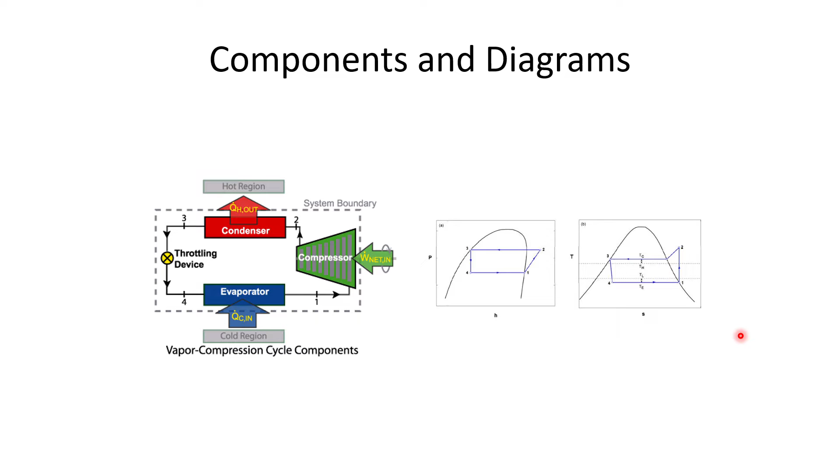This cycle we will understand on two different diagrams, that is temperature versus entropy diagram and pressure versus enthalpy diagram, one by one. This diagram is temperature versus entropy diagram. Let us understand the different processes here first. This is my peak point on TS diagram. If I follow the left side line from peak point, this is saturation liquid line. If I follow right side line from peak point, that is called saturation vapor line.

The region on the left side of saturation liquid line is a liquid region. Right side to the saturation vapor line is a vapor region, and in between these two lines, it is a mixture, that is liquid plus vapor. Point 1, we assume that my first point is on the saturated vapor line, that is the evaporator exit point. 1 to 2 is a process in which compression will happen, so temperature and pressure will increase.

You can see here when my refrigerant comes out from evaporator after taking heat from refrigerated area, the state is 1, that is a saturated vapor, and pressure is P1. After passing through compression, it will reach a pressure P2. When your pressure is increasing, simultaneously temperature is also increasing. And point 2, you can see, is in a vapor region. So this particular point is a superheated vapor.

2 to 3 process is a condensation process, means my refrigerant will enter into a condenser. It will reject this amount of heat first, that is called heat of superheat. It will become a saturated vapor, then it will reject latent heat, and it will come to point 3. This process will happen at constant pressure, and the third point is saturated liquid point.

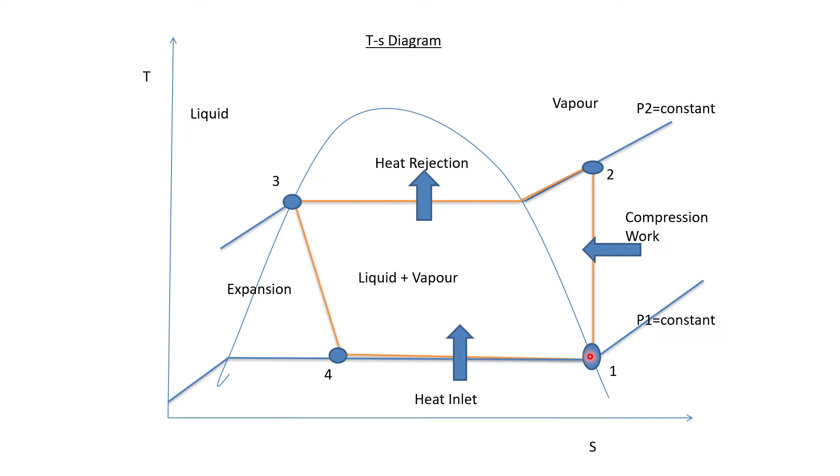3 to 4 is expansion process, in which enthalpy remains constant, entropy slightly increases, and it will reach point 4. We can see here the fourth point is in the liquid vapor region, means it is a mixture, not 100% liquid, not 100% vapor. And then it will enter into the evaporator, where the refrigerant will take heat from the refrigerated area, and it will return to saturated vapor point.

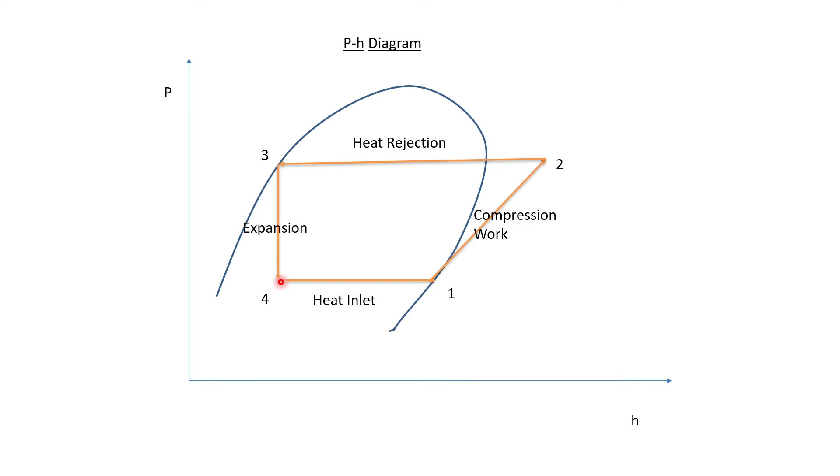Same processes we will plot on P-h diagram, that is pressure versus enthalpy diagram. 1 is a saturated vapor, 1 to 2 is a compression process, 2 to 3 is heat rejection, 3 to 4 is expansion at constant enthalpy. So 4 is constant enthalpy, and 4 to 1 is heat inlet or refrigeration effect.

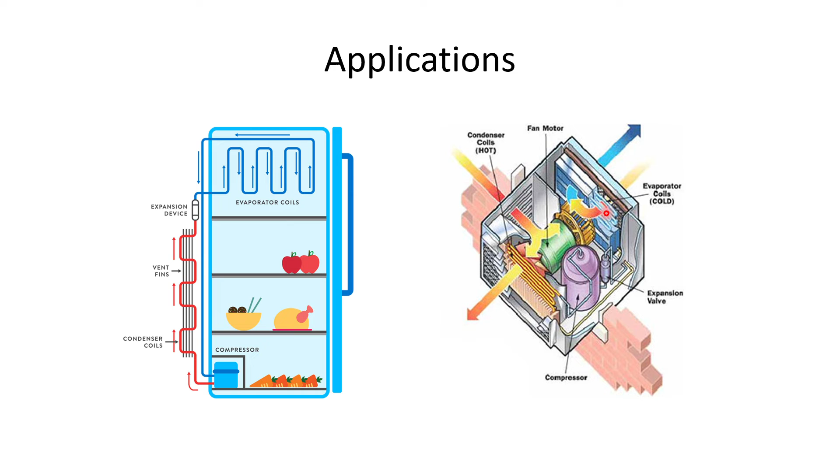Here also this is a compressor, condenser, expansion device will be here, and then it will come to evaporator. This portion will be inside your room, which will give you cool air into the room, and condenser will be outside so that heat will be rejected into atmosphere.

Now let us come to the calculation part. If I want to do a calculation of a simple vapor compression refrigeration cycle, I need to have four different points: 1, 2, 3, 4. First is the exit from the evaporator, then exit from the compressor, exit from the condenser, and exit from the expansion device.

If all points are known to me with respect to temperature and pressure, we can calculate the enthalpy, either using a property table or using the P-h chart of the particular refrigerant. We'll get H1, H2, H3 and H4. Once we have all the values known to us, we can do the calculation. Let us start with this.

Suppose I want to calculate the refrigeration effect, or cooling effect. This is the particular portion where the cooling happens, that is the evaporator. So the refrigeration effect or cooling effect is nothing but mass flow rate into delta H, H1 minus H4.

Now compression work will be 1 to 2, in which mass flow rate into delta H will give you the compression work, and heat rejection is mass flow rate into delta H here, that is H3 minus H2. It will be negative as heat is rejected, or you can multiply mass flow rate into H2 minus H3.

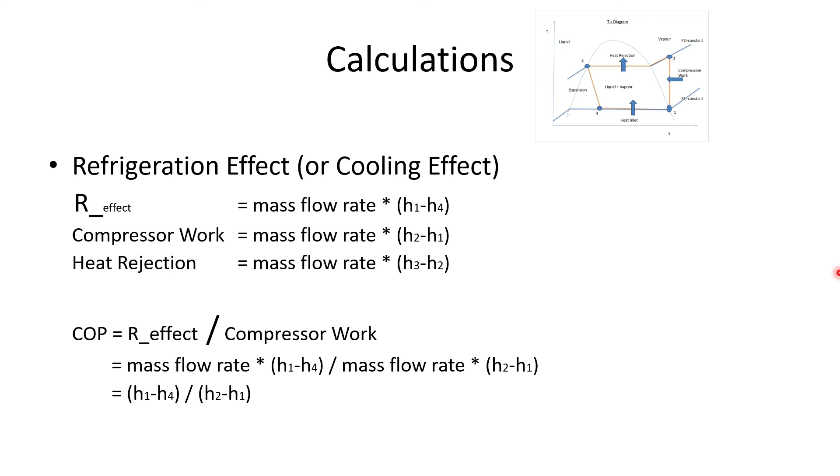The coefficient of performance of the VCR cycle is refrigeration effect divided by compression work. Refrigeration effect we already know, compression work we already know. If you take the ratio of these, it will give you the coefficient of performance of the VCR cycle. Let us understand with some numerical values.

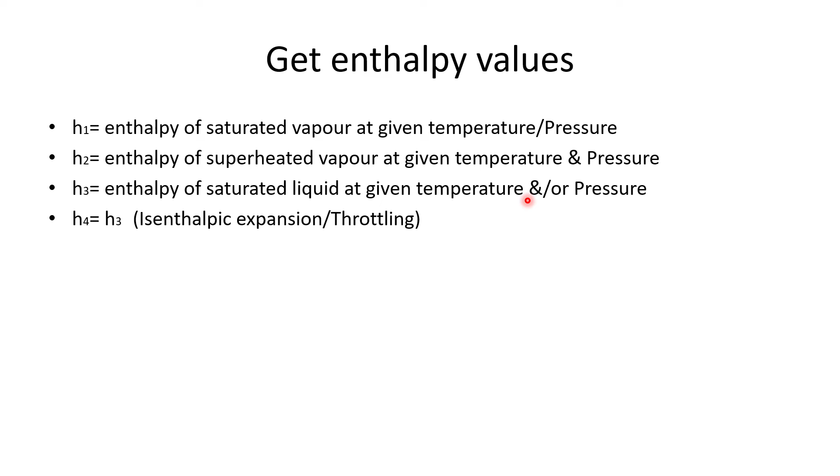As I mentioned, H1 is the enthalpy of saturated vapor at given temperature and pressure. H2 is the enthalpy of superheated vapor at given temperature and pressure. H3 is the enthalpy of saturated liquid at given temperature and pressure. And H4 is equal to H3 as it is an isenthalpic process, or throttling process. We will understand this now using R12 as a refrigerant.

When refrigerant comes out from the evaporator, its temperature is minus 30 degrees Celsius. After compression, the refrigerant temperature will become 60 degrees Celsius. After heat rejection in the condenser, the temperature of the refrigerant will become 40. After expanding, it will come to 1 bar pressure and minus 30 degrees Celsius. So temperatures and pressures are known to me. Now I want to get the enthalpy value of each point.

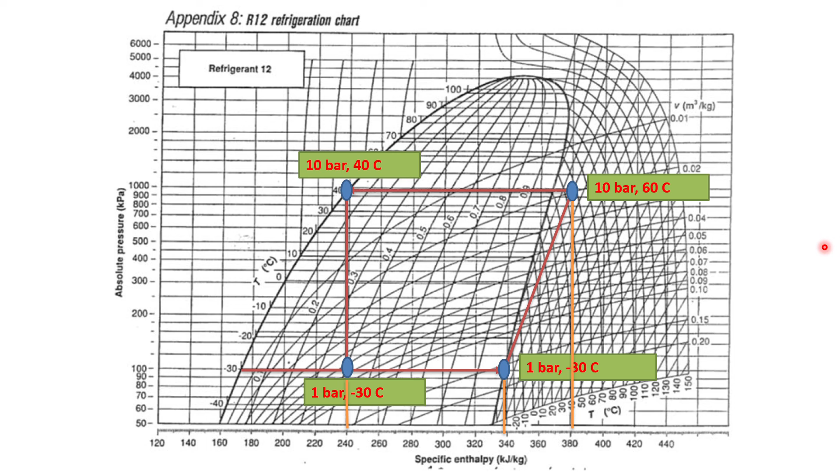Once I have all these values, H1 is equal to 338 kilojoule per kg, H2 is 380, H3 is 240, and H4 is also 240. For simplicity of calculation, let us assume that the mass flow rate of refrigerant is 1 kg per second. We will calculate refrigeration effect, compression work and COP. If the mass flow rate is known to you, you can multiply here.

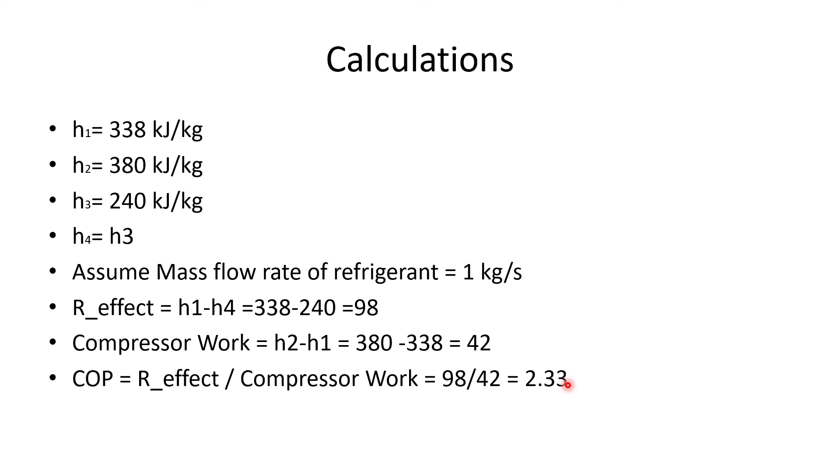The refrigeration effect is H1 minus H4, that will come to 98 kilojoule per kg, multiplied by 1 kg per second. Kilojoule per kg into kg per second will be kilojoule per second, so your answer will come in kilowatt. Same way, compression work is m dot into H2 minus H1, that will be 42. And the coefficient of performance will be refrigeration effect divided by compression work, that will come to 2.33.